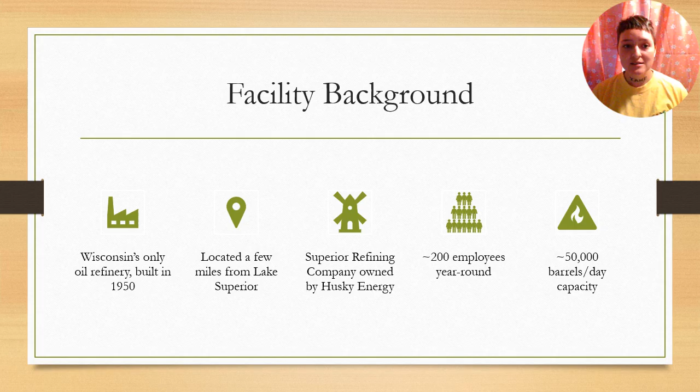Some background on the facility: Wisconsin's only oil refinery, built in 1950. It is located near Lake Superior. It was owned at the time by Husky Energy of Calgary, Canada, and employed about 200 individuals year-round. It has an approximate 50,000 barrel per day processing capacity, with which they process heavy and light crude oil from Canada and North Dakota to produce gasoline, diesel, and asphalt.

Of particular pertinence, the facility's fluid catalytic cracking, or FCC unit. All new to me, so doing my best to explain. It uses heat and a sand-like catalyst to break the crude oil hydrocarbons apart into smaller molecules, with which they produce gasoline and other products.

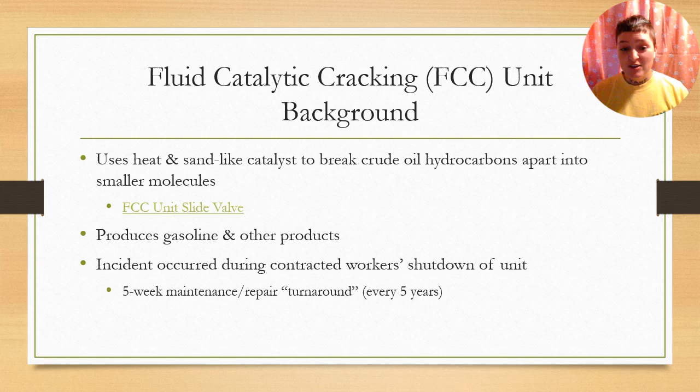I've linked here a clip from a longer but awesome animation of the entire incident. My clip shows in particular the functionality of a mechanism known as the slide valve, which was involved in the incident. The incident occurred during contracted workers' shutdown of the unit. This is every 5 years, a 5-week maintenance and repair period known as a turnaround.

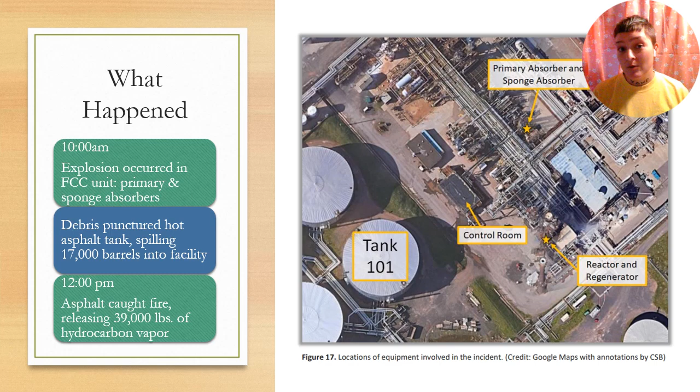An explosion happened, shook buildings up to a mile away, propelled large metal fragments up to 1,200 feet away. Debris punctured a hot asphalt tank, and that spilled 17,000 barrels out into the facility. Within a couple hours, that had caught fire and released a lot of flammable hydrocarbon vapor. There were 800 to 900 people on site at the time, and this was due to their large number of contract workers. Some additional photos.

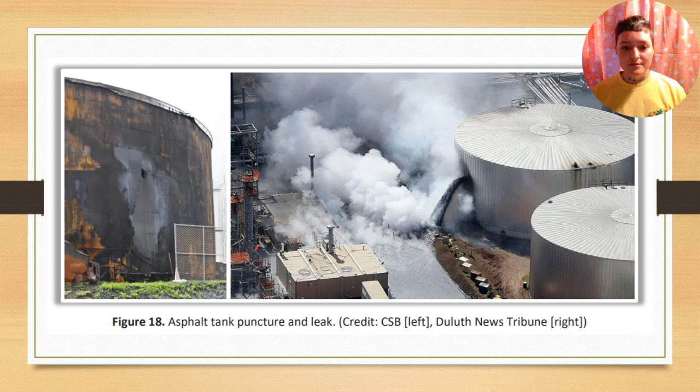The CSB identified the cause of explosion as a severely eroded slide valve. This had allowed air to leak backward into downstream equipment containing hydrocarbons, which created a flammable mixture, which eventually ignited, unfortunately. Of note, this erosion had been previously documented in the last 2 turnarounds, 2008 and 2013. Ultimately, they provided 16 recommendations, not only for the refinery and its ownership, but the American Petroleum Institute, OSHA, and the EPA. This was pretty widespread and industry affecting.

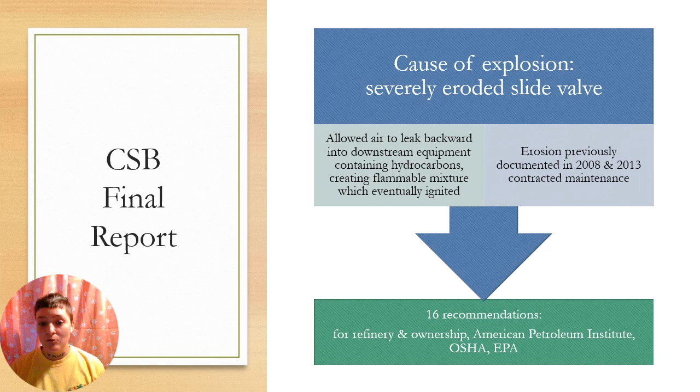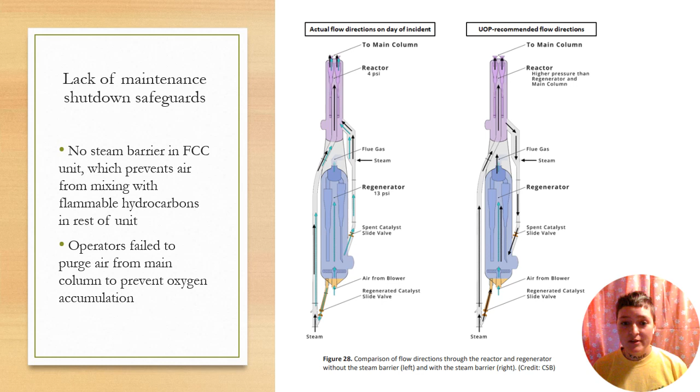Now, to summarize the multitude of system safety issues at play here. Firstly, a lack of maintenance shutdown safeguards. For one, there was no steam barrier in the FCC unit, which would have prevented air from mixing with the flammable hydrocarbons. Additionally, operators failed to purge air from the main column. Now, if you hadn't watched the clip, this hopefully will give you a little better idea of the various mechanisms and the airflow within the unit.

Now, given that the aforementioned was lacking, there was still a chance that staff could have adequately investigated or responded to pre-incident events, but unfortunately that was seemingly not the case either. It was noted in investigation that 2 booms were heard, the second even with a visible flare. Stack flow changes detected by their continuous emission monitoring equipment went unheeded, and it was the board operator's first turnaround. He did not monitor the slide valve pressure level either.

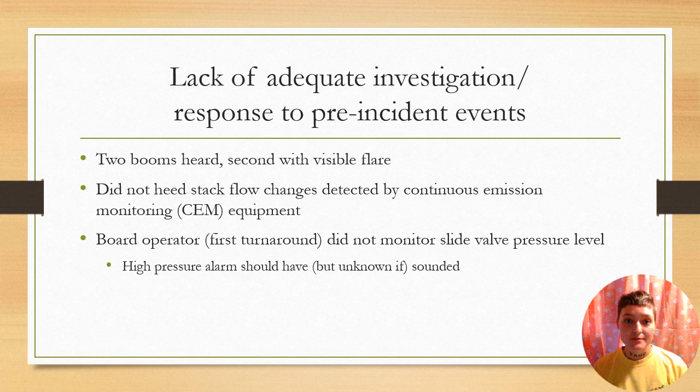Even furthermore, it's just a multitude of factors here. I think these things are really damning. It shows their absolute failure to take interim steps to mitigate risks and address potential hazards. For instance, no documented inspections of repairs nor any evidence of preventative maintenance work since 2008 on. The vessels that exploded, the absorbers, their shells were made of questionable steels.

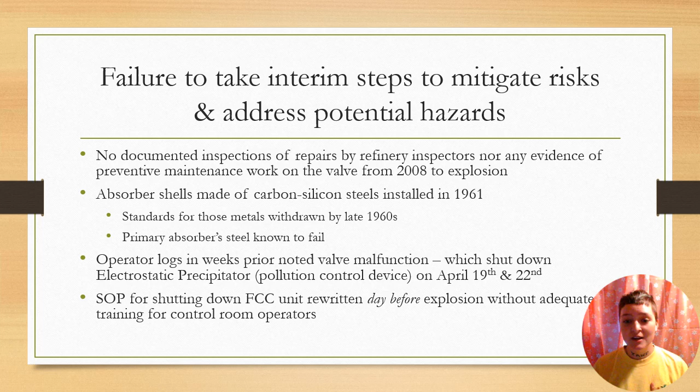And the operator logs in weeks prior even noted valve malfunction. This shut down a pollution control device 2 days prior. And additionally, adding to this, the operating procedure for the FCC shutdown was rewritten the day before the explosion happened, and so the operators were operating with limited training.

Now, onto the impacts. Human-wise, it could have been so much worse than it was. No fatalities, but 36 workers did seek medical attention, thankfully for mostly minor injuries. And nearby residents were affected as well. This was due to fear of a hydrofluoric acid leak, due to the fact that exposure can cause pretty serious burns and lung damage and potentially be fatal. I did note that there were, I believe, 2 civil suits filed by contract workers, as well as a citizen class action lawsuit, although I'm unsure of the results of those.

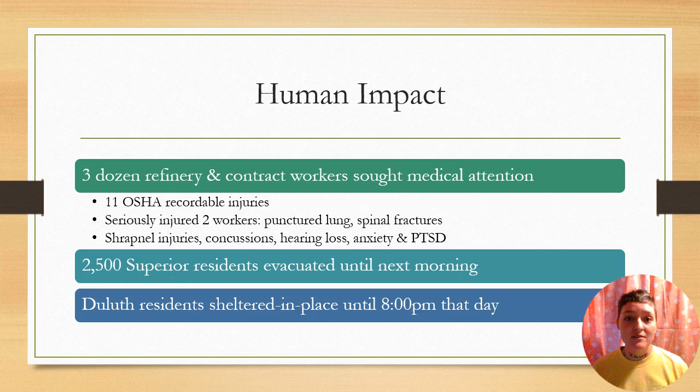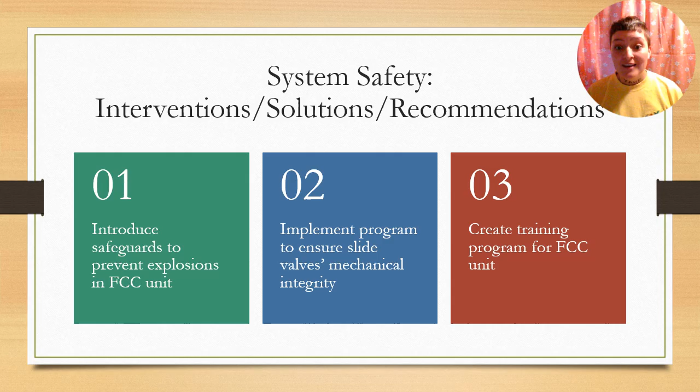Now, interventions, solutions, recommendations, etc., improving this system safety. There's a lot to be taken from the CSB report all along the hierarchy of controls. These are some of the top 3. Introduce safeguards to prevent explosions in the FCC unit. Implement a program to ensure the slide valve's mechanical integrity. And create a training program for the FCC unit.

Adding to that is my personal recommendation. I wish that in the realm of elimination/substitution, the company could commit to removing hydrogen fluoride from the refining process altogether, given the risk it poses. My understanding is that a lot of refineries do not use it any longer.

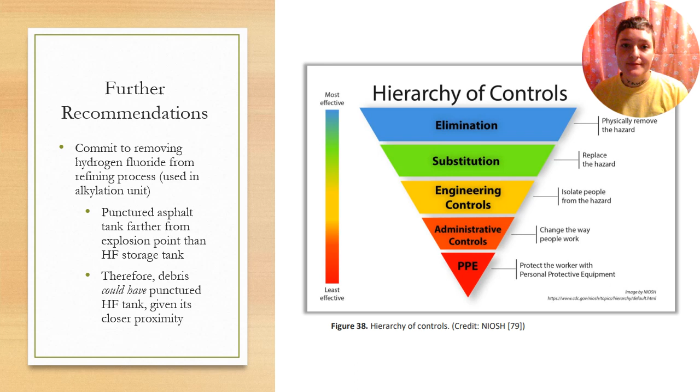The refinery today, what's actually happened, what's happening? It's under new ownership, also Canadian. The rebuild tripled in cost from projections, saw some COVID-19 delays naturally, but that's expected to be covered entirely by insurance. And they anticipate resuming full operations in a month or so here with an increased number of employees, about 350.

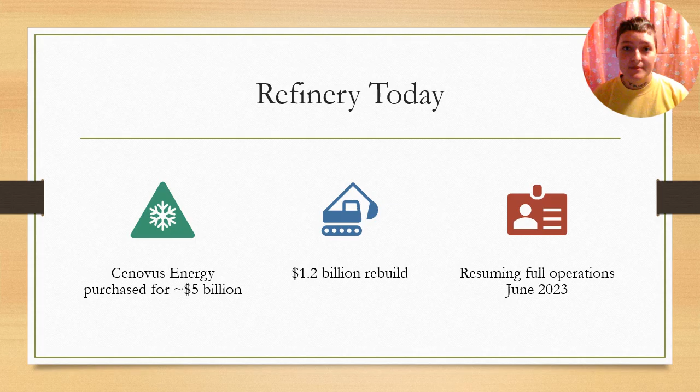As they tell it, they've done a lot. All OSHA abatement, working with local officials. So, the multitude of system safety measures they've put in place. State-of-the-art slide valves, advanced instrumentation to monitor FCC unit operations, even a new control system to overall enhance shutdown safety. That's great. As well as improved training materials, simulators even, and some other upgrades.